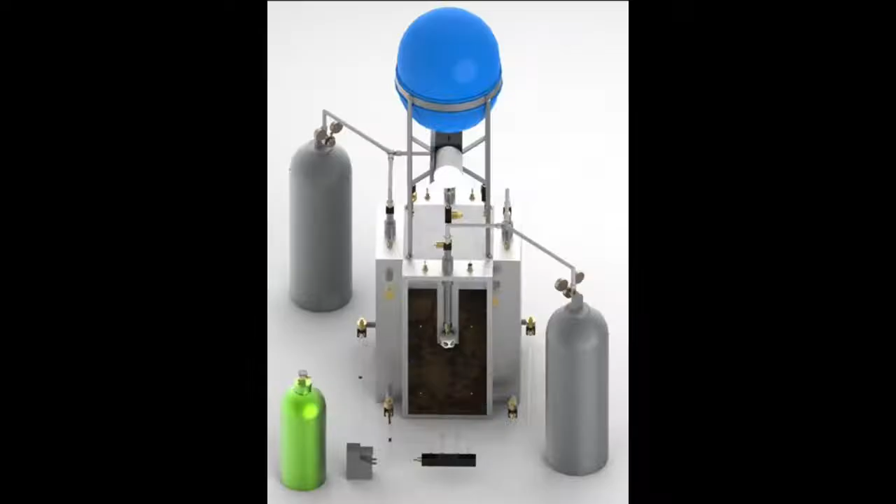The final design adopts basic chemistry principles to produce heat. The rusting of fine iron wool generates heat that is used to warm the battery. It is important to note that iron only rusts in the presence of oxygen and water.

The system kicks into action when the temperature sensor attached to the battery falls below 5 degrees Celsius. The sensor sends a signal for the solenoid valves to open, releasing the reactants into the reaction chambers. Next, the reaction starts generating heat, which is transferred to the battery through conduction. Once the battery's temperature sensor rises above 5 degrees Celsius, the solenoid valves shut off.

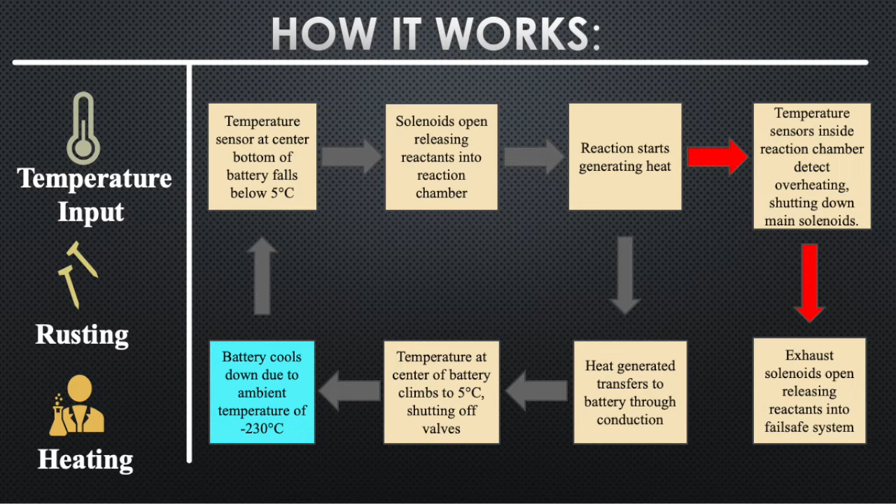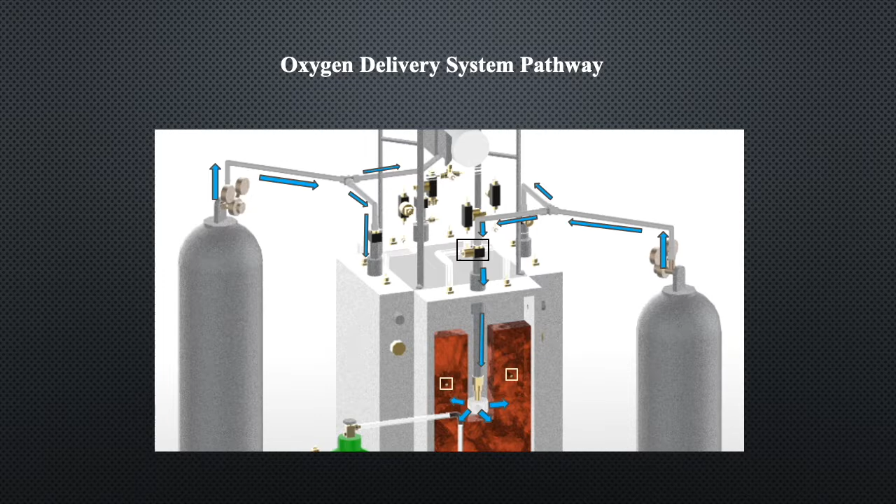The final assembly consists of the oxygen distribution system, the water distribution system, and the failsafe system. As the oxygen enters the chamber, it encounters stripped iron wool and starts the reaction. The circles embedded in the iron wool are temperature sensors to monitor data.

Water is dispensed from a water tank into a DC pump, which distributes the fluid across all 4 chambers, passing through the water solenoid valves. Once inside the chamber, the water is finally misted into the stripped iron wool.

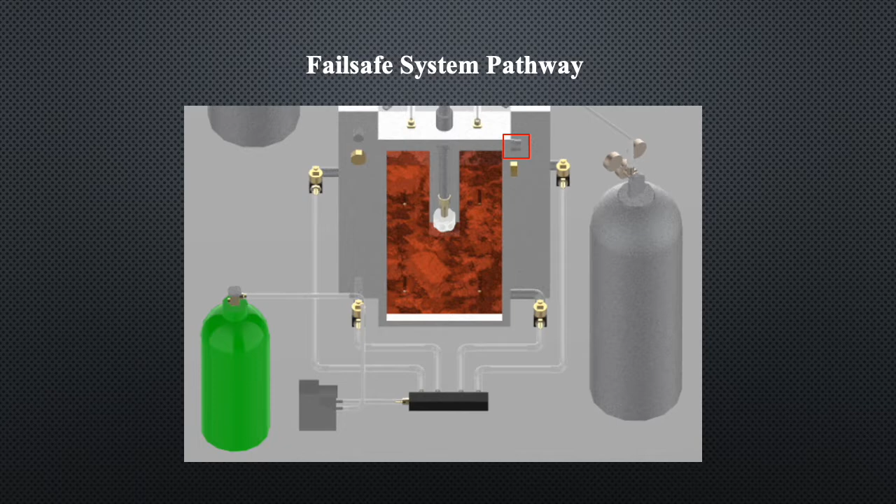Attached to the inner upper part of the reaction chamber, one can locate a humidity sensor for data acquisition purposes. If the temperature is too high inside of the reaction chambers, the solenoids shut off immediately and the reactants are channeled to the failsafe system.

In order to create a prototype of the reaction chamber, a scaled-down version was designed and assembled. The oxygen is distributed to the system in the same fashion as the final design, however a manual valve was used instead of a solenoid.

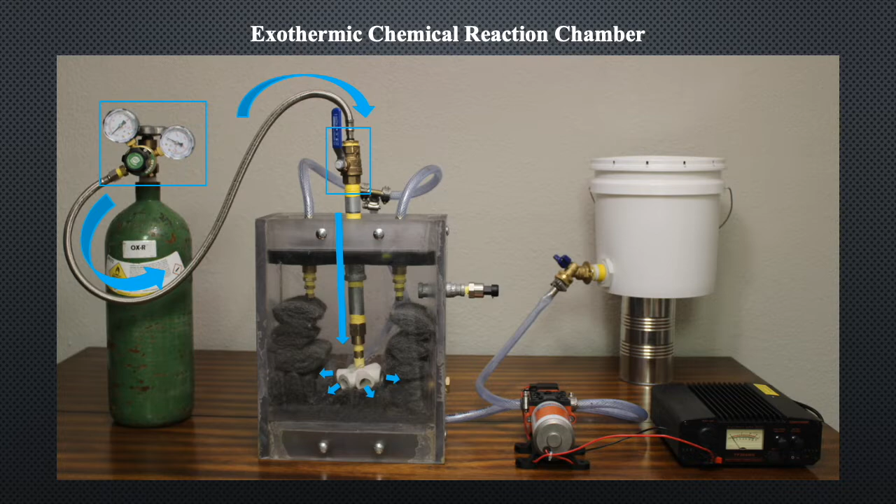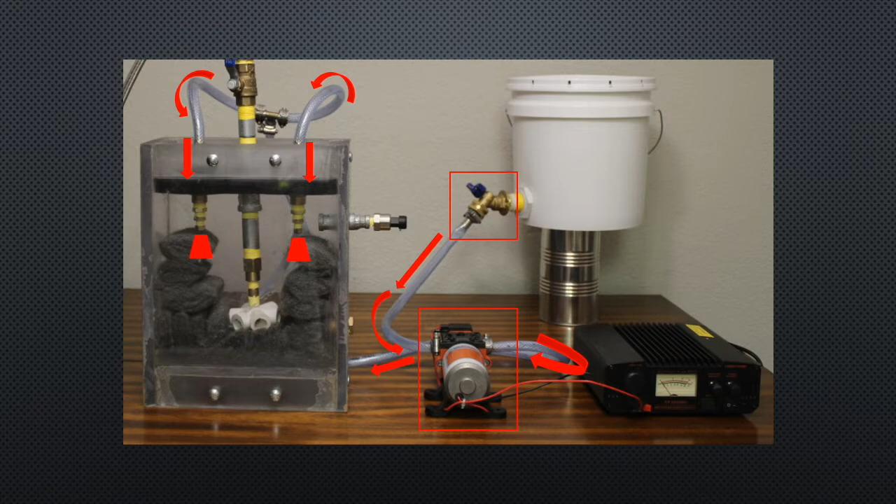The same goes for the water distribution system, where water is fed by a DC pump into the chamber where misting nozzles disperse the water evenly on the iron wool. 3 types of sensors are used for data acquisition within the prototype: the humidity sensor, the pressure sensor, and the temperature sensors.

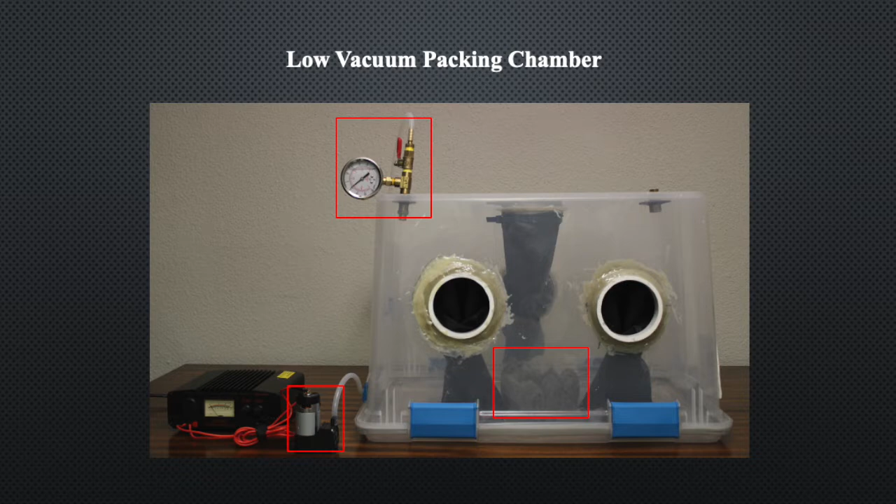A low vacuum packing chamber was designed and created to remove the protective coating from the iron wool and pack it inside the reaction chamber.

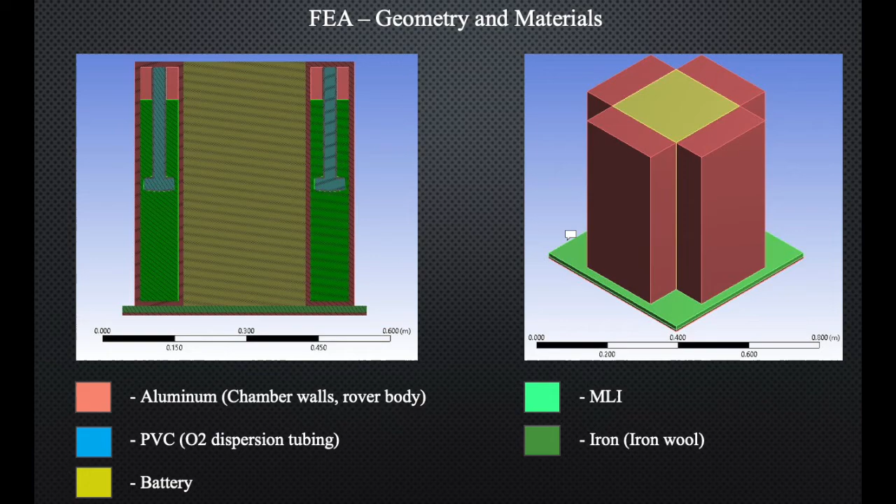In order to visualize the effects of ambient cooling on the system, as well as the heat generation due to the exothermic reaction, a transient thermal finite element analysis was conducted using ANSYS Workbench. The geometry of the model consists of the battery surrounded by 4 adjacent reaction chambers, sitting atop a layer of MLI and the rover body. The thermal loads applied are a constant internal heat generation within the iron wool, as well as a constant temperature of negative 230 degrees Celsius at the bottom surface of the rover body.

In order to visualize the effects of ambient cooling on the system, as well as the heat generation due to the exothermic reaction, a transient thermal finite element analysis was conducted using ANSYS Workbench. The geometry of the model consists of the battery surrounded by 4 adjacent reaction chambers, sitting atop a layer of MLI and the rover body. The thermal loads applied are a constant internal heat generation within the iron wool, as well as a constant temperature of negative 230 degrees Celsius at the bottom surface of the rover body.

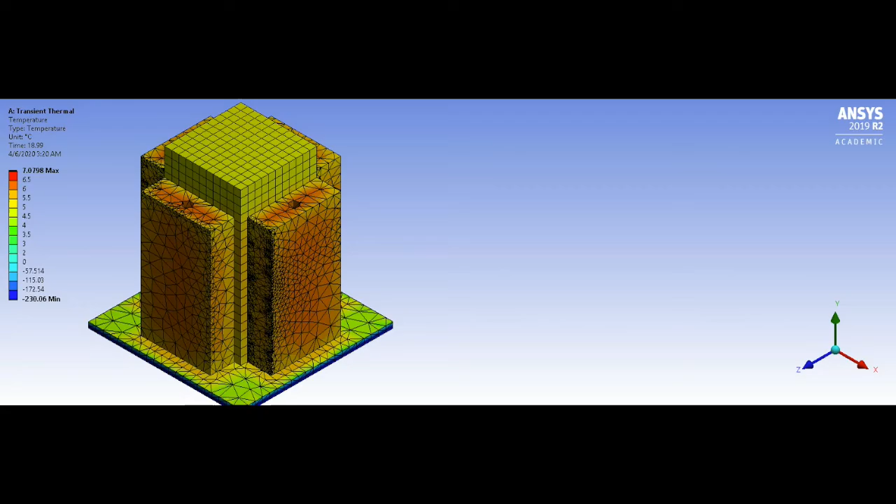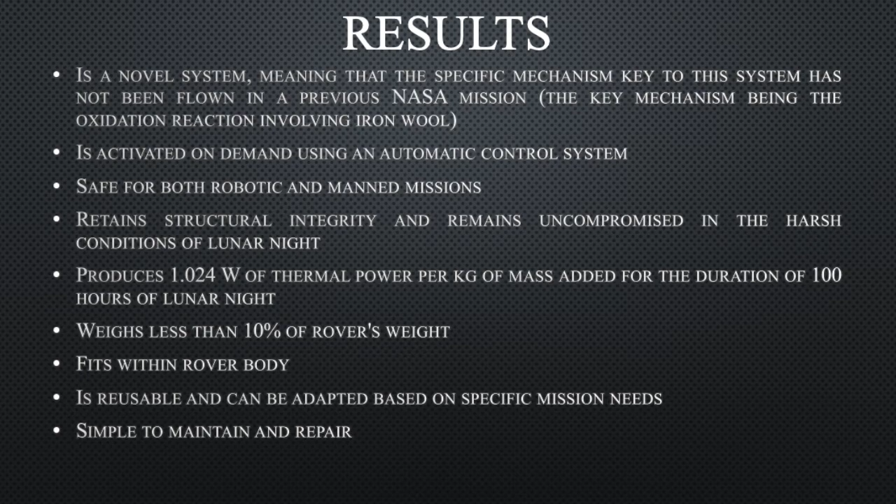What we were able to accomplish through our project is the design of a novel system that not only weighs less than 10% of the rover's weight, but also delivers 1.024 watts of thermal power per kilogram of mass added. Additionally, our system is reusable and simple to maintain and repair.